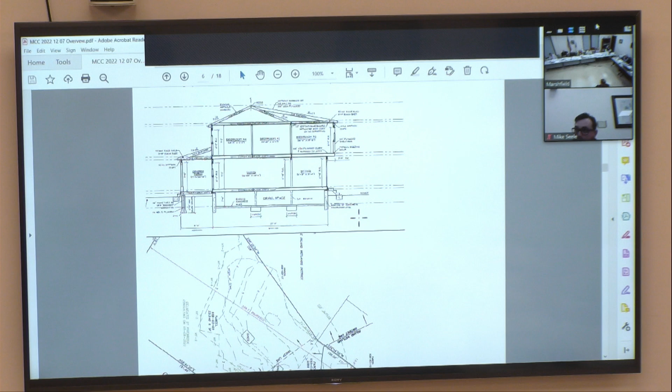We walked the property. Essentially, there's two additions being proposed here: a farmer's porch off the front, and a second-story addition off the back of the house. The land is subject to coastal storm flowage, it's in a flood zone. The project is within a buffer zone of a wetland resource area, beyond the 75-foot mark but within the 100-foot mark. There's a slight increase of impervious coverage due to the steps and the deck, a little over 7%.

So why don't we have Rick make a little presentation? Absolutely. Rick Servant, Stenbeck and Taylor. So yes, you covered a lot of it, John. Two small additions: the rear addition is the second story addition, which is above an existing footprint that's already there. The front porch is going to be on sonotubes and up off the ground. The entire property is in an AE flood zone, so that'll be on sonotubes with clear space underneath.

The rear of the house is clipped by the 100-foot buffer, which was delineated by Pine Brook Consulting. That's really what they're proposing to do - just trying to expand a little bit with that front porch and mostly that second-story addition, which won't cause any excavation or impact to the ground surface.

The front porch, although in the flood zone, is out of the 100-foot buffer, but still in the flood area, with a slight increase to 286 square feet of coverage. I did want to point out they're only at 7.7% coverage of the lot, even if we approve this project, which leaves 28,000 square feet of open space on the lot. So they're only covering a very small portion of what they own.

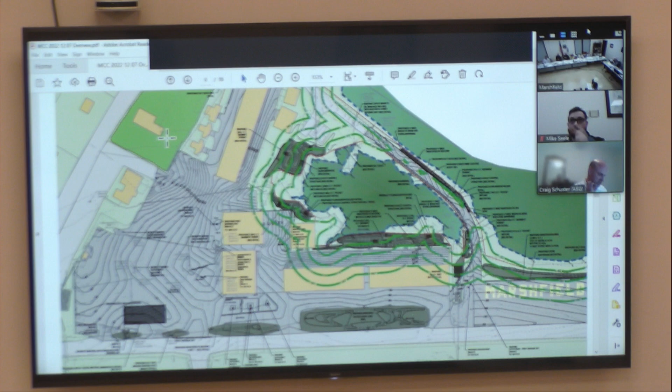So I'm going to turn it over to Dan, because this project addresses the pre-order of conditions issued under the runway project in June 2012. With that, Dan, why don't you go ahead and present. Thanks, Craig. My name is Dan Nietzsche with GZA. We did the delineation work and provided the notice of intent, working with Merrill, who did all the engineering work. I'll talk about the resources and the work being done relative to resources, then Dana can talk about the specifics of the design work, the drainage and so forth.

Around 2012, this airport got a variance from DEP to do runway reconstruction. Part of that approval was to do stormwater improvements at the airport. The department allowed that to be deferred until the airport could find funding for that type of work, and so we're at that stage. This was an approved project through the DEP variance, but we didn't come to you folks to get a specific order of conditions for this, so that's why we're here now. That gives you the context of what this is about. It's not something brand new, it's been in the works for basically 10 years.

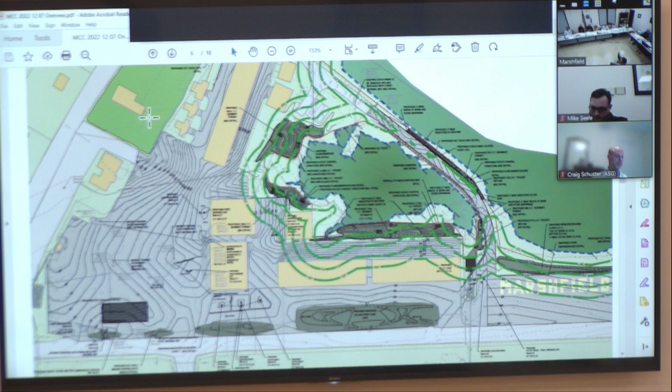As Bill said, that was a great video, we appreciate it. It shows the bordering vegetated wetlands right behind the hangars. Is it better if I go up and point? Okay, that's helpful for anyone who may not be available. So these are two T hangars here, here's the bordering vegetated wetland. On the other side of the fence that Bill was taking shots over, this is a bordering vegetated wetland too. This has a pipe that connects to here, which makes that border to that border, which then borders on Bass Creek. So that's where we're getting that. There's no other resource area in here. The ditch Bill was showing is a stormwater drainage ditch that discharges right here, the double barrel pipe, and then conveys into the BVW. The blue is the delineation that's been essentially approved many, many decades, over and over again. We keep reapproving that same line. There's nothing really changing in that area, so it's unlikely to get bigger or smaller.

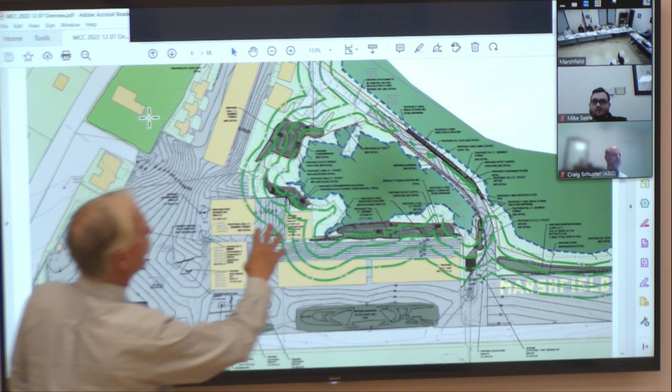So the work area, we're in the buffer zone, in your 25-foot setback in some places. The lawn areas you saw in the photographs right around this BVW, that's where all this work is happening. As Bill said, we're not going into the BVW, just working in the buffer zone within maintained lawn areas. No mature vegetation is being removed or grubbed out, we're just working in the lawn. Dana will talk about that more. So we're going to be working within the buffer zone.

The entire site, as you folks know in town, is within the land subject to coastal storm flowage. We're not displacing flood in any way, not that that's really a performance standard for that resource area, but we're keeping this all within an existing, developed area. The access road Bill mentioned in the video is going to go right over the riprap you saw, the gray riprap in front of those pipes. So the new road will come to here, jump right over the riprap area, and continue to here, and the pipes will just be extended through that little addition. For safety purposes, we have to get the trucks out of there, they can't be going in here.

This area is identified as Marshfield, that's a run-up area. Planes pull in there, rev up their engines, make sure everything's working right before they get out to take off. So that's a very important area for the airport to have available to them, but by that action, we have to keep people away from that.

So I think I'm going to turn it over to Dana. Before I do that, in terms of compliance, we're in compliance with the Wetlands Protection Act. I think we're generally in compliance with the bylaw. The mitigation plan was something that was discussed.

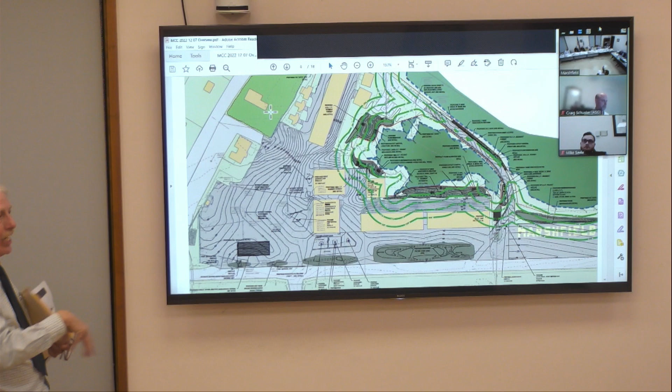And I'm going to turn that over to Dana for the design and the stormwater management. Thank you. Good evening. My name is Dana Montalbano with Merrill Engineers and Land Surveyors.

This property, as you're probably well aware of, Jake, you've been out there many times. It's pretty flat. When you're looking on site, it doesn't look like there's much elevation change at all. Generally your highest point is over in this area, probably elevation 10, and then as you're getting into these BVW areas, it's about elevation 2 to 1, even down to 0 as you get further into the Bass Creek area. So water's kind of generally flowing this way, with some various ways of getting there, but it's generally going in this direction.

The site is considered a land use with higher potential pollutant loads, or a LUHPPL, as defined by the DEP Stormwater Handbook. So that's kind of what's triggering this also. Currently there's really no stormwater treatment controls on site. So one of the things they wanted when they came back to improve the site was to add some stormwater controls to provide some water quality treatment in this part of the site, which would be considered redevelopment.

As Dan mentioned, in 2012 DEP granted a variance for both the Wetlands Protection Act and the Stormwater Handbook. Special conditions 70 and 71 of that variance really speak to the stormwater quality improvements we're looking to have on site. As I mentioned, currently there's really no treatment, so there's a lot of room to work there.

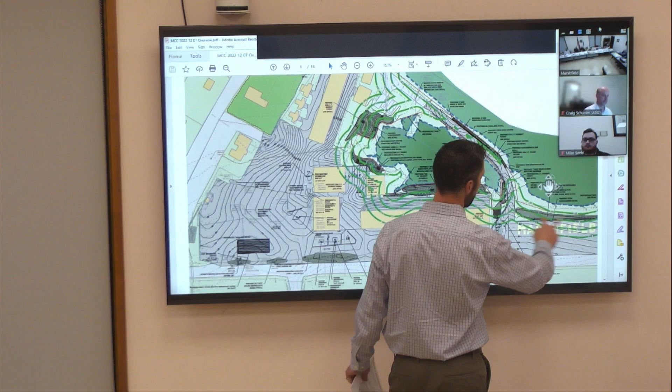Over here in the municipal apron, we have a bio retention area. Runoff from this larger apron area will be directed to a stone diaphragm for treatment, and then ultimately into the bio retention area for treatment.

There'll be plant uptake and treatment through the media of the bio retention area itself, and then it discharges to the wetland the treated, much cleaner stormwater.

We will be proposing silt sock around the downgradient limit of the work, just to ensure that there's no sedimentation of the BVW during construction.

As I mentioned, all of these areas will be providing pre-treatment through sediment forebays and vegetative filtration, both of which are approved BMPs for use within this level. Same thing with the pocket wetland - not only is it a good fit for this site, where in many instances there's historical clearing up to or very close to the existing BVW.

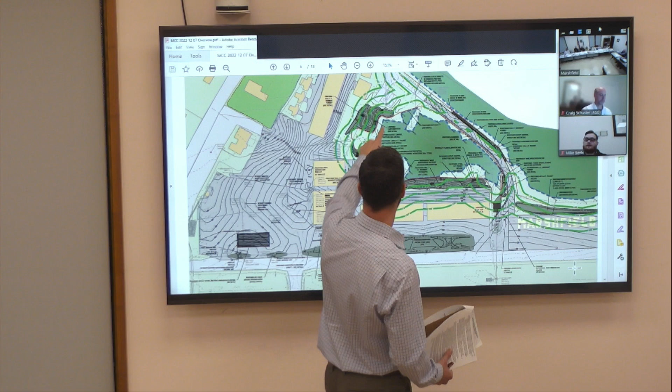We tried to incorporate the pocket wetlands just the way it works out - it fits well, and they provide the pre-treatment, but also some buffer area and habitat that offer a lot of benefits to the existing BVW. So we've tried to take advantage of areas where the tree line has been cleared and pushed the pocket wetland up there to act as additional buffer, as well as providing habitat and water quality treatment.

We have received comments from both the town engineer and Finn. We have made some minor adjustments to the plans, modified a few scrivener's errors and typos and things like that, which we'll provide as a final update of the plans to the commission after we take any comments tonight. Kind of wrapping it up, we have modified a few things.

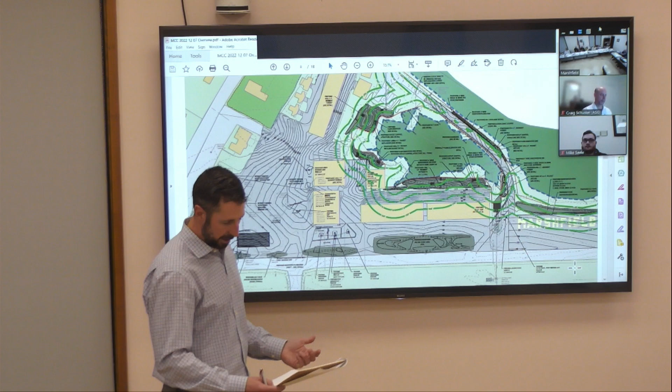We did submit for a floodplain permit application with the building department. I did receive a few minor comments today. It's kind of the standard language, pre-construction meetings, things of that nature. There's no major plan-related comments or anything like that, just a procedural set of comments. I think that's pretty much it. If you have any questions, we'd be happy to answer them.

What is the impact on pervious versus impervious surface? There's a slight increase. I think that table's just cut off. Yeah, sorry about that, I know the table's on there.

The area within the 25-foot buffer, we're offering about 17,900 square feet. 25 to 50, we're offering 22,260 square feet, and 50 to 75 is 23,640 square feet, 75 to 100 is 20,870 square feet. Okay, which sheet are you on? That's C4.1. Thank you. That's the area within the impact area within the buffer zone.

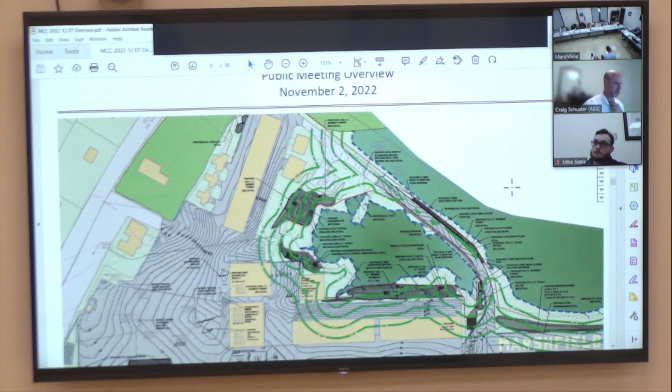What happens if this is not submitted by the end of this month, vis-à-vis the funding? Greg? Yeah, I'll have to talk to the FAA about that. I think they might have some leniency to go into January. So I'd have to get back to you on that.

I think it's important to note that the draft special conditions are really our standard package of special conditions that staff always drafts up for near every project that we look at. Nothing special really in these, and they're very standard, just a few minor edits.

Yeah, they're very standard, except for mitigation. It was my understanding that you wanted to have draft special conditions to look at—that's why they're called draft. Does any commissioner object to moving forward with this tonight?

I love this project, I think these guys did a great job, but I think Mr. Pasevich should have had every opportunity to review any of the materials that he thought were pertinent. I think he should have. That's not true, I think you should have. Well, I should have, yeah, I'm agreeing with you. I'm saying that any of those things you wish you had asked for, if they were available before this meeting, he should have had an opportunity, as well as any other resident, to look at them.

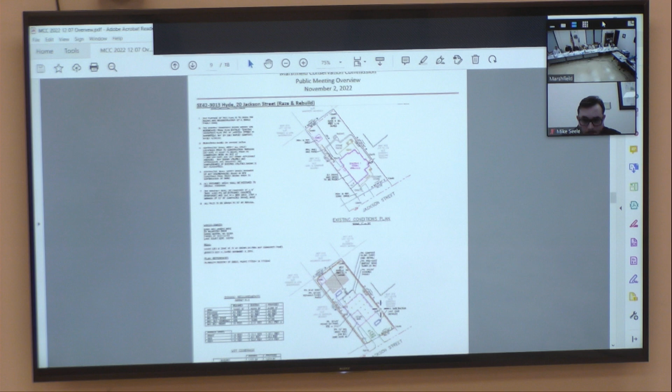The proposed pile-supported house would be, as shown on the plans, 30 foot by 37, with a rear porch and a small one-car garage underneath, visible in the bottom left corner of the site plan, which is the proposed conditions plan. If we review the zoning table in the bottom left corner, you can tell it's a pre-existing non-conforming lot in terms of lot size and some of the setbacks.

We're doing the best we can to comply with zoning setbacks. We're actually improving them relative to what's there existing. We're proposing downspouts with Cultec to mitigate the impervious surface amount. In fact, on the bottom you can see we're increasing the pervious amount by approximately 1,300 square feet.

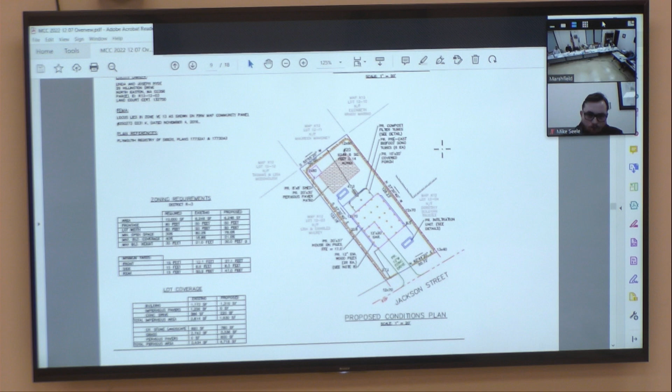There is a proposed pervious paver patio in the rear. They're really not proposing a larger structure. We've done everything we can to comply with DEP's best management practices for designs in the resource areas, and you can see the various details for the roof downspouts and the pervious paver patio. Again, we've done everything we can to mitigate the pervious to impervious ratio. At this point, I'll open it up to any questions you might have. Thank you.

Do you have any comments, Mike? Not particularly, I just had one comment. I was wondering, since they're only keeping one little section of concrete in their driveway, and doing pervious pavers in the back, whether they had considered doing pervious pavers on that concrete driveway area as well. Then the whole site would be pretty much perfect as far as compliance. Great question. I know one of their concerns was trying to plow snow and de-ice in the winter, so we did talk about it.

So that's really why they wanted to have the concrete driveway, so that it could be properly managed for cases like that. Just wondering if they considered that.

It is an overall improvement. It's bringing it up above the floodplain and becoming compliant with those regulations. So I would like to open it up to commissioners. Any comments? Concerns?

Are there any, is anybody on Zoom or in the room that has concerns about this project? All right, well, seeing none, what I'd like to do is make a motion to close the hearing and approve an order of conditions.

Special conditions that, Mike, would you like to read those? Yep, so the standard special conditions would apply with the following inserts. Under D2, during work, ensure that erosion controls are in place, do not use hay, which might introduce invasive species into wetlands and setbacks. And also an insert under D3, an elevation certificate shall be provided to the Conservation Department.

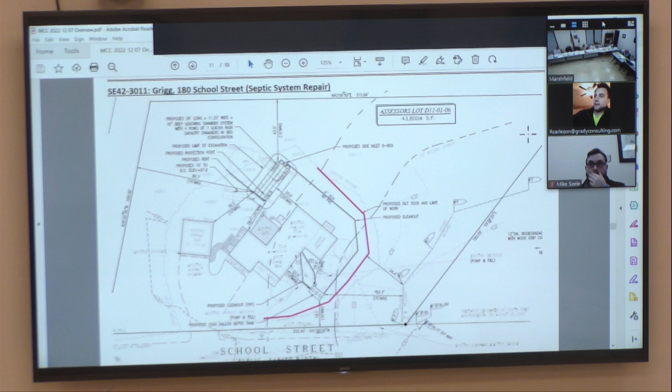And the red line is the silt sock. Oh yep, exactly, yep, we have a proposed silt sock. Also, everything is limited work. Basically, all of the work will be taking place in an existing lawn grass area. Once the project is completed, it will just return to grass, and yeah, I think that's pretty much it.

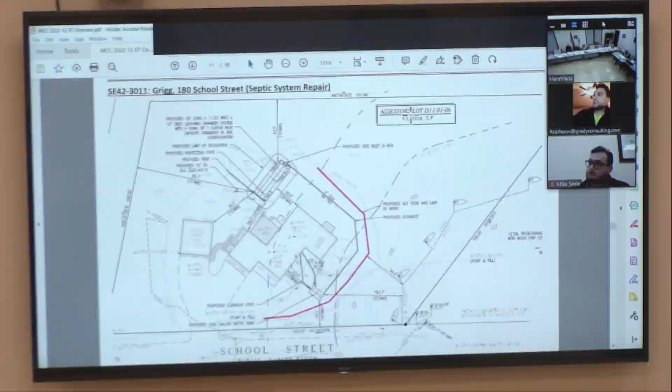All right, thank you, I apologize for not recognizing you up there. Any commissioners have any questions? All right, so Mike, special conditions you would like to cite? The standard special conditions would apply with an insert under D2: ensure erosion controls are in place and do not use hay, as it may introduce invasive species into wetlands and setbacks.

Okay, so with those special conditions, I move that we close the hearing. Do I have a second? Vote? Second. Second? All in favor? Aye, aye, aye, sorry. So I think our work is done.

And thank you, all right thank you guys. Then we are on to 76 Carolyn Circle. This is a continued hearing. The hearing officer is Commissioner Ring. This project has been around for a long time.

I believe it started back in 2019. Is that about right, Terry? In its original form, yeah. It's been back and forth. And we brought it to the last time that we were before us, and there were 2 outstanding issues. One is the dock was 240 square feet when the town regulations, town bylaw says 200, and the other was to resolve issues around one property, one dock. And this project has been around through 2 revisions of the rules.